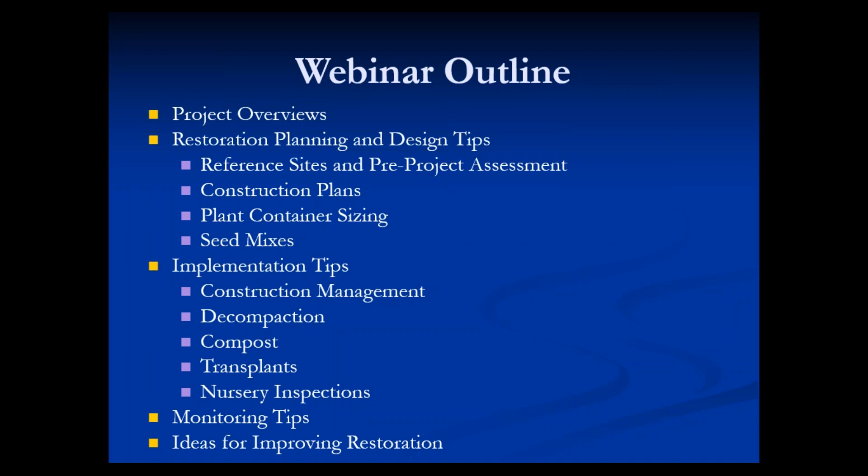So let's get started. I've got 4 projects I wanted to share with you, and they're spread around the state. We have 3 different regions, basically, of Colorado. The eastern half is essentially part of the Great Plains. The middle third of the state is essentially all higher elevation, western mountains and valleys. And then the western third is arid west. We're going to start with a project outside of Meeker, which is in the western mountains and valleys.

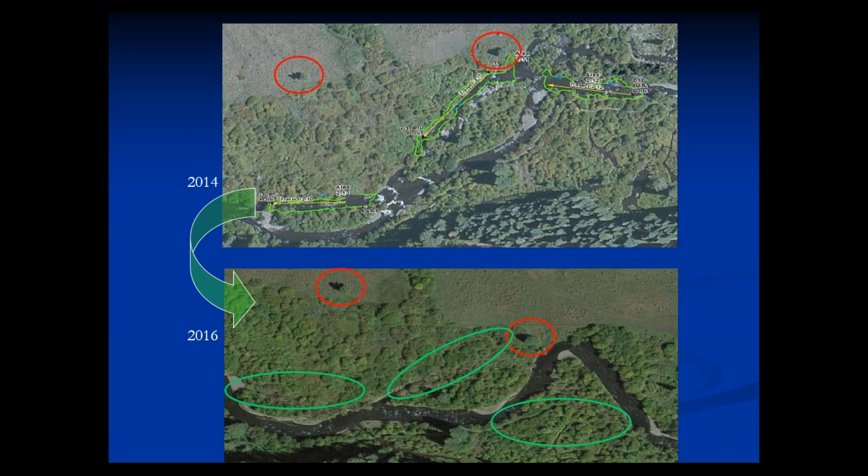Here's another reach that we worked on. You can see all those weirs in the channel. We basically pulled those out, restored some sinuosity, and re-wetted the floodplain. So again, very nice results 2 years later. This is what the sites look like on the ground. You can see great vegetation establishment. These are 2 different sites 1 year after construction. So we were able to salvage a lot of sod and a lot of whole willow transplants. Okay, so that's it for the Meeker project.

Now let's move to one in Fort Collins. This is the home of Colorado State University, where many of my friends and colleagues do their work. This is on Fossil Creek, right in town. We restored 1,500 feet of the channel and about an acre of wetlands, and did this project with Ayres Associates. And here you can see it's pretty confined work area. We have residential development and ball fields on both sides, and this was a drainage that was historically probably not even perennial, and became a water conveyance system, basically carrying water from one canal to the next, which completely unraveled this whole thing.

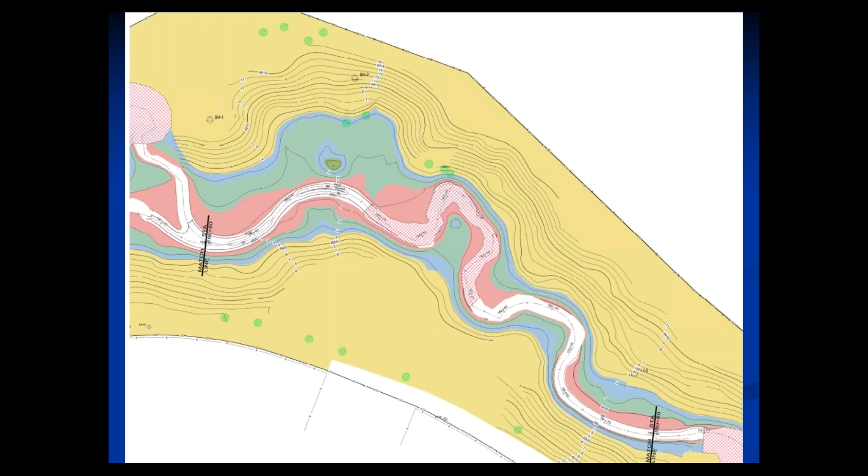This is our design. The different colors represent different target habitat types. So red being emergent wetland, green being scrub shrub, and blue being riparian, and then yellow uplands. And so this is what it looked like after construction. So 2015, we did the work. As I said, it's very confined. So we had to use these soil lifts in some areas to protect the banks because we couldn't lay them back and get shallower slopes.

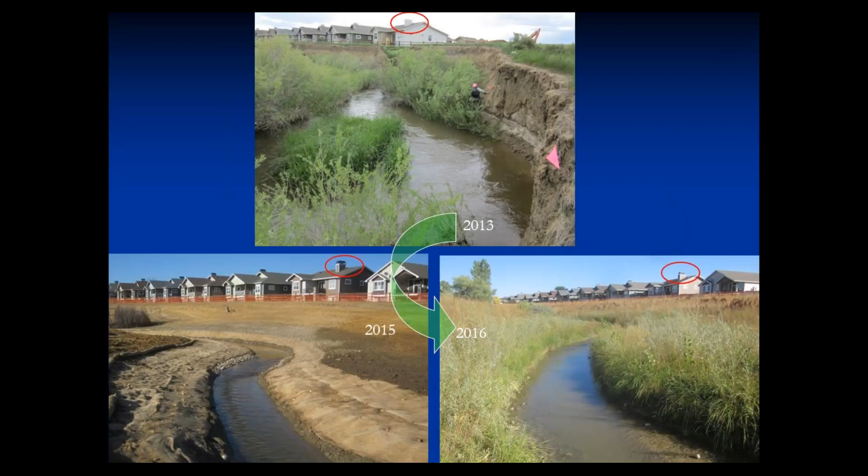But you can see excellent vegetation establishment in 1 year. Again, the red circles to calibrate your eye. A lot of these are really hard to convince yourself you're looking at the same view, especially for this project. Incidentally, the housing development was under construction in 2013, so all the houses aren't even in this photo. That's why it looks a little different.

Again, here's another view. You can see in the lower left, this is really nice. Right after construction, you can see our zonation that we were planning on. You can see the zone of saturation. So again, very nice establishment 1 year later.

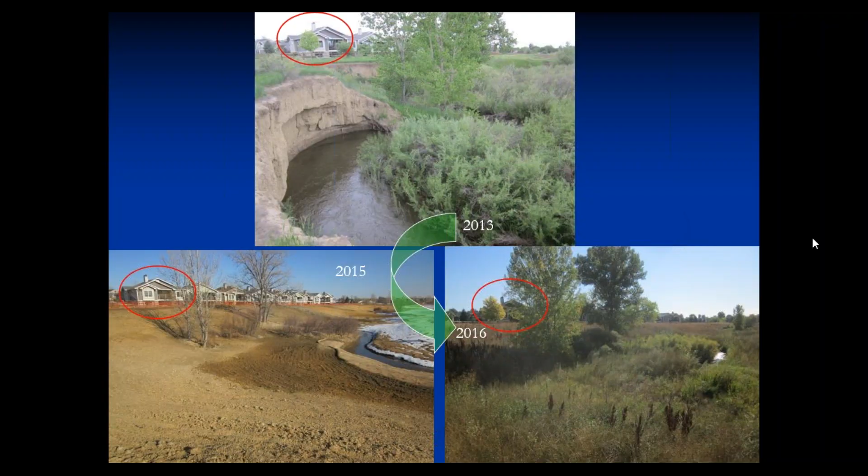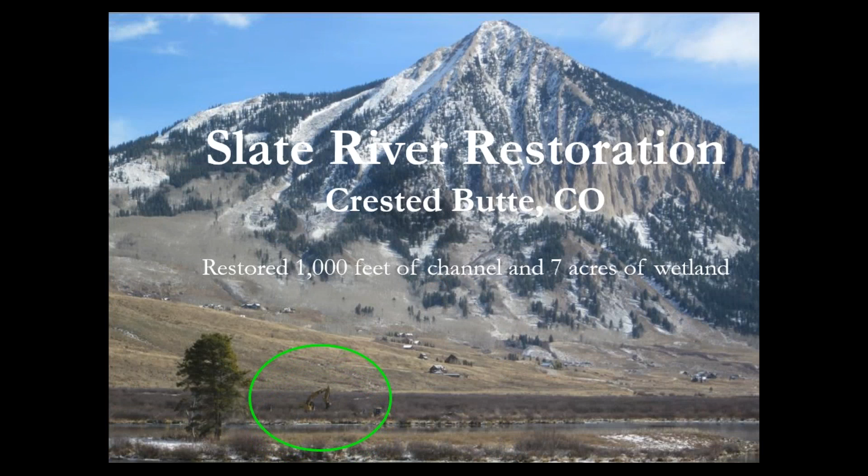Okay, another example project is one in Crested Butte. This is again in the higher elevations, and this was the Slate River restoration. We also call this one the Peanut Reach because it's next to Peanut Lake. And here's our excavator in the foreground for scale, so you can see what this site looks like. Basically, this is the town of Crested Butte, and our site is just outside of town, right next to Peanut Lake, which is a very popular recreation destination for bird watching and hiking.

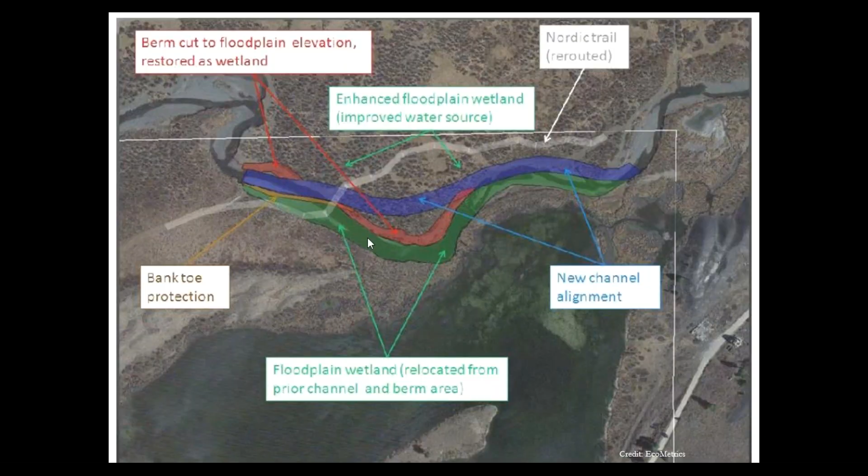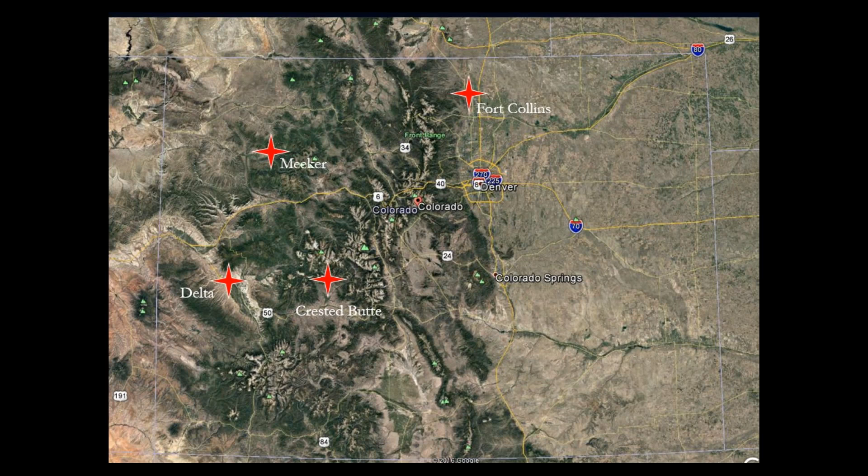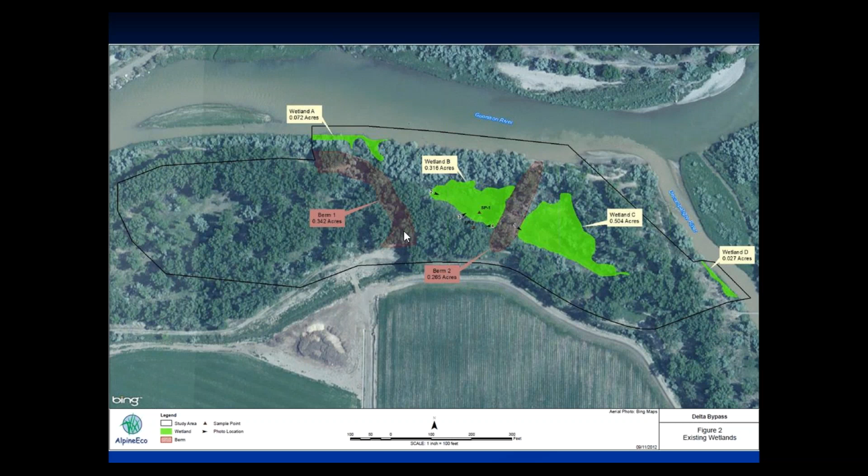Okay, next project and last one is over in the arid west in Delta, Colorado. This was a 404 compliance project, a Clean Water Act compliance project. So wetland mitigation, created about 3 acres of wetlands down at the confluence of the Uncompahgre River here, the dirty, muddy one, and the Gunnison River. This was a map of the site before our project. So existing wetlands are in green, and these red areas are berms, old fill areas that we wanted to remove from the floodplain, again, to try to reconnect these rivers to the floodplain environment.

This is the plan, basically to create new wetlands here in orange and connect to the old, take these berms out, and create what is essentially a meander scar or secondary channel type environment. Originally, I wanted to connect this to the Gunnison River on the downstream end here, but because of land ownership issues, we couldn't actually do that. So we ended up making our backwater connection here on the side, and that allows high flows to enter the site and provide additional functions that we wouldn't get if we didn't have that surface connection. We didn't want to connect here at the top because we didn't want to run the risk of capturing the river in our site.

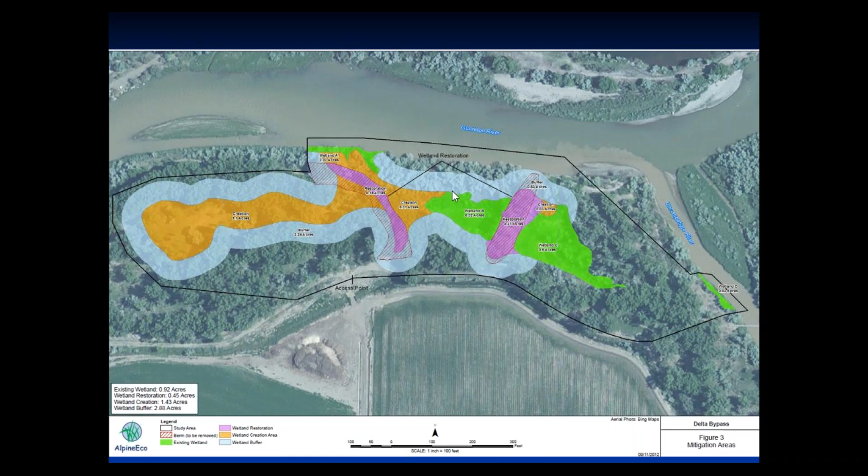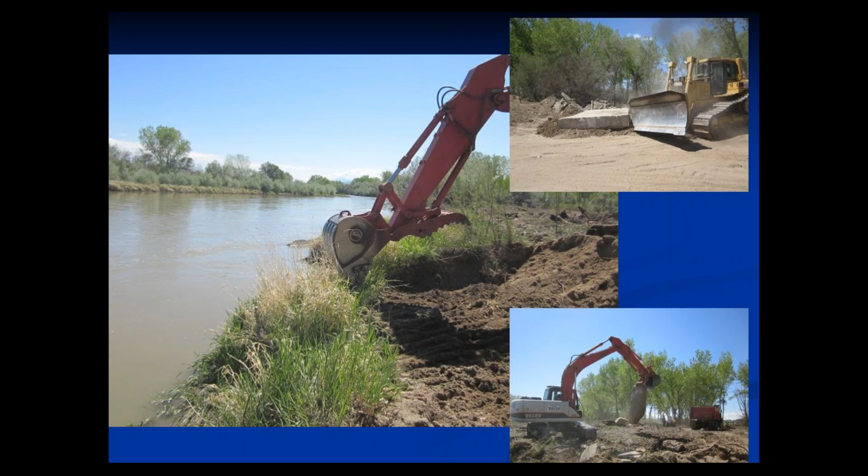Here's the construction of the connection to the river, and then the other side photos here are pulling the berms out, mostly broken concrete from, I think, the 40s and 50s. This is what the site looked like after construction. Again, just a meander scar type setting. We were able to salvage some of the trees we had to take down, which was only about a half a dozen, but we were able to salvage them and place them back into the wetland area as habitat features. So you can see here, this is right after construction in 2013.

The site's very dry and cobbly. Maybe it would make some people nervous, but I felt confident in our design and our depth of excavation, knowing that we would be getting seasonal inputs from the river and seasonally high groundwater.

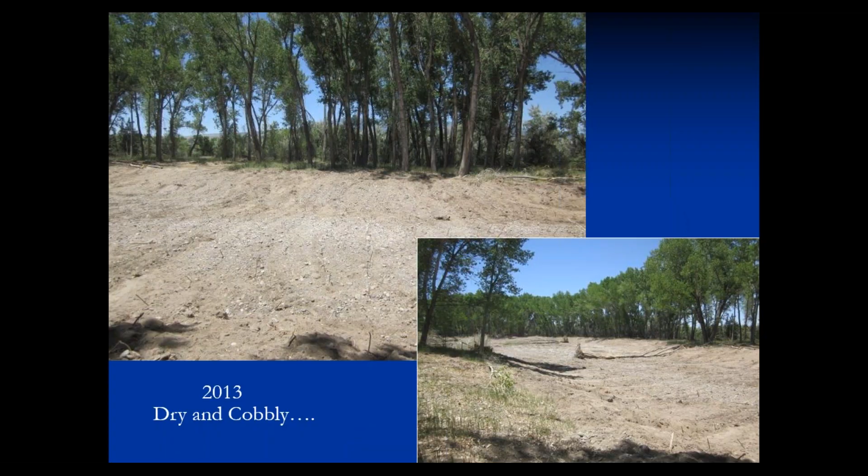So we just kind of crossed our fingers and hoped for a normal snowpack, because that's what's feeding this system, snowmelt in the higher mountains nearby. And luckily, it worked out. This was spring 2014, and we had really good snowpacks. We had excellent runoff. You can see this is the Gunnison River flowing left to right and entering our site as planned through our backwater channel.

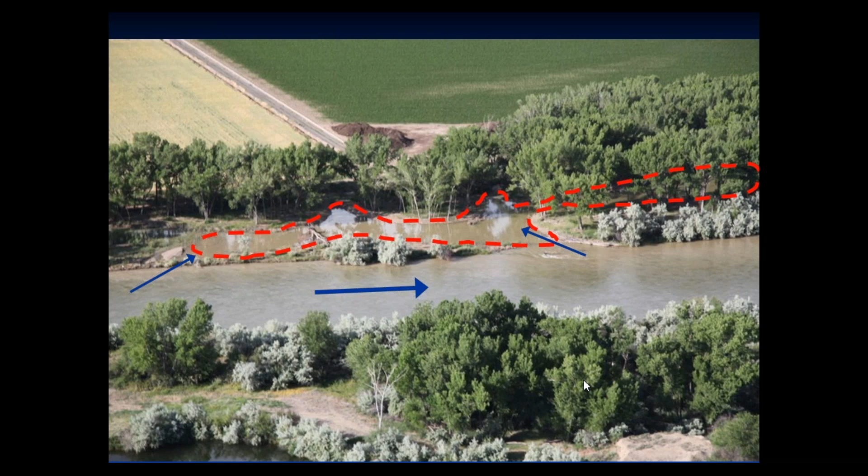And then we were actually getting some additional input here from the top because the river was so high. Our normal high flows would be only entering here. So it worked out great having that water enter the site, and then it actually stayed in the site for about 6 weeks. We ended up getting all kinds of fines deposited, and it created a perfect environment for the germination of thousands of cottonwoods and willows, creating this blanket.

And you can see in this photo, we actually have some of our planted willows in the photo too. So it turned out great. This is the site this year, 2017. We've got willows 8 feet tall, and cottonwoods as well. Another good success story for us on the Gunnison River floodplain.

Okay, so that's about all I've got for project overview. I wanted to go ahead and get into some of the restoration tips. And again, I didn't mention this on the outline slide, but this presentation is not intended to be a comprehensive list of things that you need to know to restore wetlands. It's not even a complete list of the different steps that need to be taken. What it is, basically, is some of the issues that seem to come up frequently, topics that are easy to discuss in this kind of format, and important things that I think could provide some value to you as practitioners or researchers on your projects, hopefully.

So I want to start by talking a little bit about planning and design tips and the importance of pre-project assessment. We need to have some data to guide our restoration designs and our restoration goals. And the best way to do that is to do the pre-project assessment so you know what's wrong with your site. So again, let's go back to our Meeker example. In this case, I'm using a tool, Functional Assessment of Colorado Wetlands. This is FACWet, we call it, created by my friend and colleague, Dr. Brad Johnson, and also Mark Beardsley and Jessica Doran. It's a rapid assessment method for assessing wetland condition. It basically gauges the departure from reference condition.

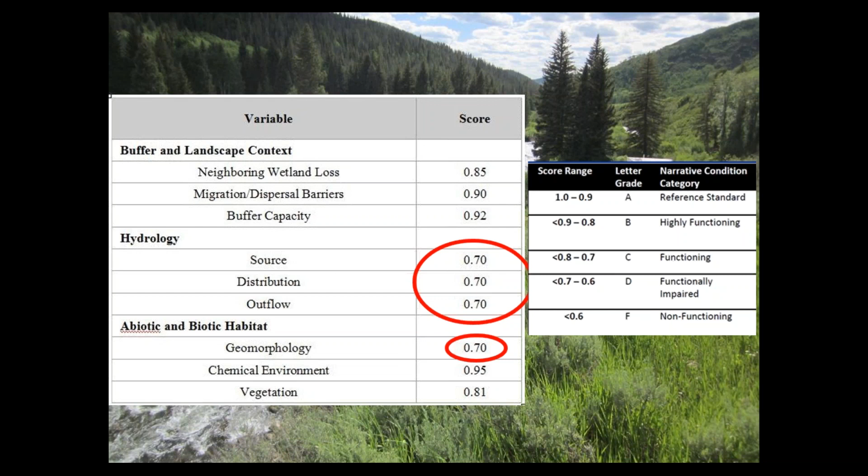So, with a 10-page data form, you end up scoring different variables, and you can see for this project, our hydrology variables got dinged pretty hard because of those weirs and levees and lack of overbank flow. And then we can take those variable scores and turn them into function scores, and that again helps guide us: what is it we're trying to fix? What are the goals for our project? So we're using this assessment tool to tell us what we really want out of our project.

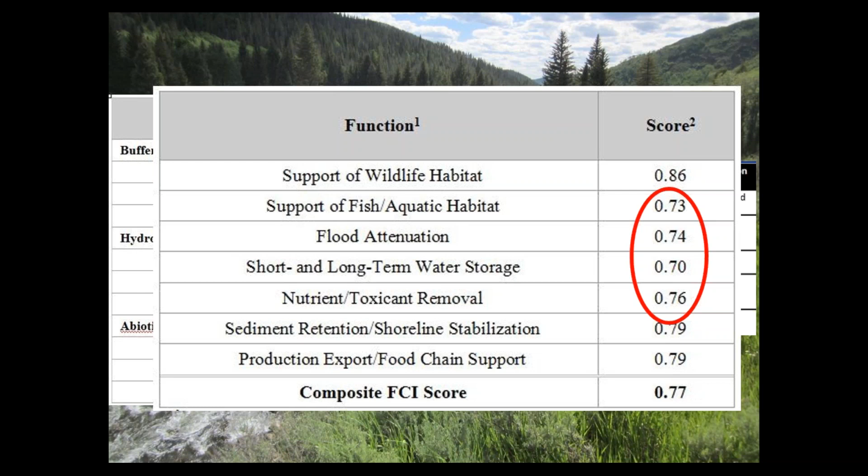Another way to get information about your project and what you want your restoration goals to be is to use reference sites. This one is a little problematic in my opinion. It's hard to know what reference condition is. It's hard to define what reference is and what it means. And it's sometimes hard to find reference sites, honestly. In some of these areas where there's been significant human development, it's difficult. So I wanted to just touch on this briefly with a project. This is on the Poudre River. It flows basically from outside of Fort Collins, Colorado, down to Greeley, Colorado.

This summer, I did an assessment of the riparian vegetation of 40 miles of the Poudre River, and this site struck me as a potential reference site for the project. Connected floodplain, meaning it's overbank flooding into this area. You can't see the river in this photo, but it's just off to the left. So the site's getting wet seasonally, which is allowing for a lot of cottonwood and other woody plant recruitment through this regular disturbance regime of big flow events and then low flow. And the site really looked good. It was really what we wanted to see adjacent to the river.

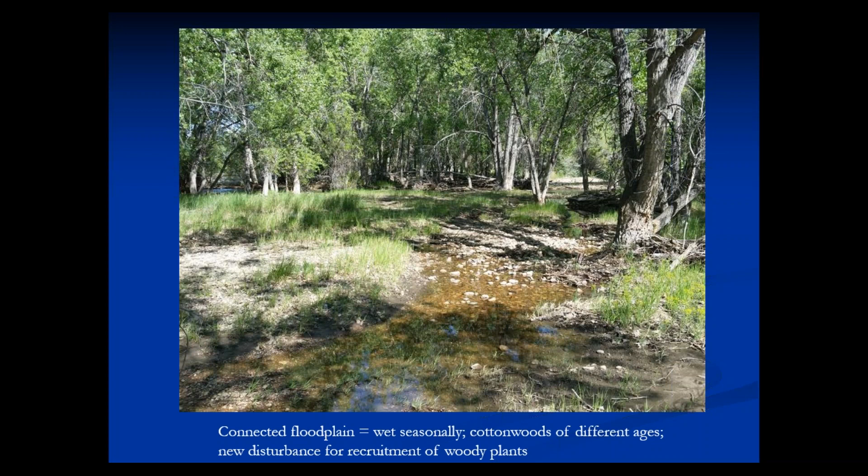And so we scored all these different riparian polygons, and our photo was taken right around here where my cursor is. But you can see we scored these sites anywhere from an A+ to solid Bs and C+, which is pretty good. But it might strike you as fairly low scores for a quote-unquote reference site. But I just wanted to make the point that these reference sites aren't always pristine. They have to be within the realm of what's possible today, given our constraints.

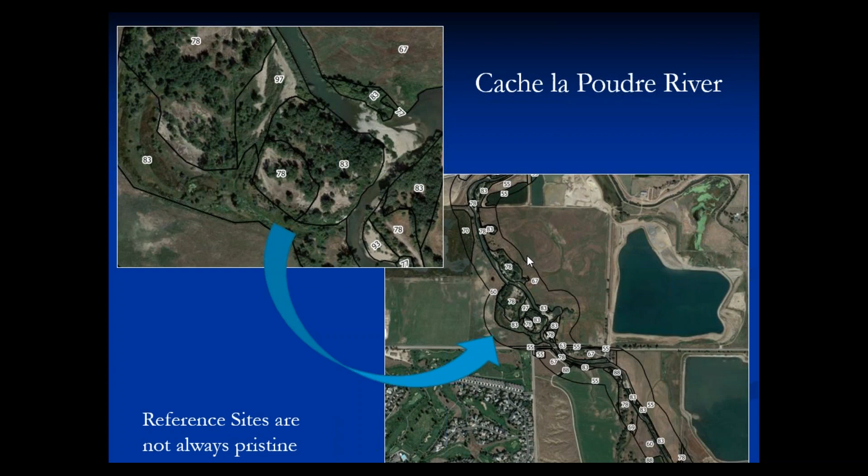And what's interesting is if we zoom out a little bit more, this is the same area, and you can see the scores around here are pretty bad. Like we have some Ds and some Fs, basically because of land use practices and so on. And if we zoom out even more, we can see, wow, this reach of the river is really altered. How could you possibly get a reference site in this reach?

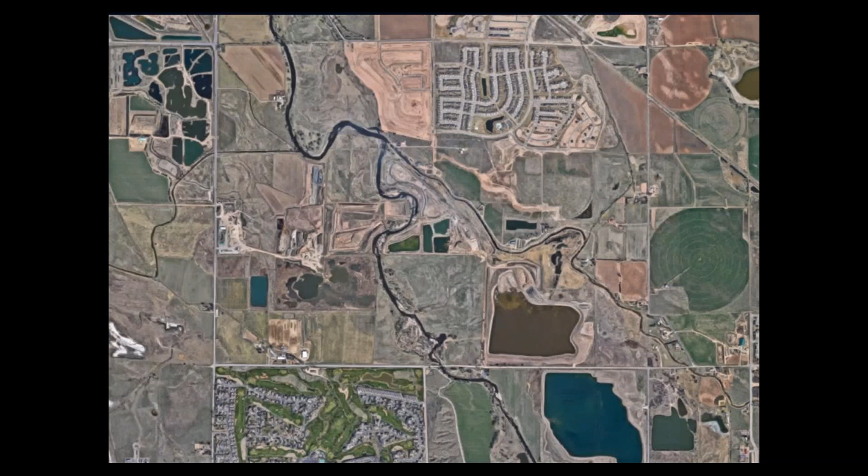But if we look for a diamond in the rough, we can find these areas and use them as reference sites, knowing that this is what may have occurred elsewhere in this entire reach, and keeping a close eye out for these, again, these gems in the rough.

Okay, continuing with the planning and design idea, let's talk just a little bit about construction plans and developing construction plans for your restoration project. When I say plans, I mean the ones that all the contractors are carrying around in their trucks and walking around in the field with. It's your design and all the details that go with it. Typically, we would contribute sheets to these packages for projects on the restoration earthwork and the revegetation details.

And what I like to call thorough simplicity is really the target for my designs. I want my designs to be concise but informative. These plan sheets can't be too complicated or messy or difficult to decipher, because then a lot of the details get ignored or just cast aside. When we're putting together these plans, we're always thinking about constructability. And what I mean by that is, what does it take to actually implement the plan?

And if you haven't done a lot of this kind of work and you haven't been around a lot of heavy equipment, I would suggest befriending a contractor who does, because you can't do an effective design for a restoration project without some level of understanding of what is possible for equipment and for people to actually do. There's lots of different kinds of equipment that you can use for these projects, but they all have their own subset of issues with regard to access and maneuverability and capacity to move material and so on. And there's a lot of complicating factors with trucking, and it gets complicated. So if you don't have a comfort level with constructability, then try to connect with someone who has that experience.

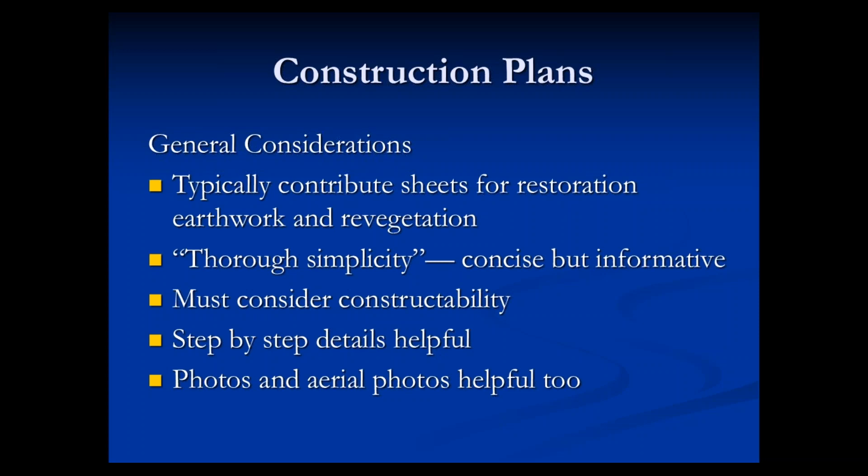So let's talk a little bit about the construction plans. This is, sorry, I lost control again here. Try this one more time.

There we go. So this is an example of a planting plan. This one came across my desk recently, and it basically exemplifies everything I don't like about planting plans. In fact, I'm getting a little dizzy just looking at it. It's not impossible, but it's difficult to decipher what's going on here. It's too busy. There's a lot on here. And one of the most important issues that I have with it is designating specific areas for planting woody plants. You can see these circles are to indicate shrub and tree placement.

To me, this is a landscape architecture design. This is like urban planning. It's like building a park. You know, you want the oak tree next to the bench. This is not restoration to me. It's not the way I think we should approach these projects.

Now, this is more like what my restoration plans look like. They look simple. This is actually the Delta project. We've got 3 zones of plant material. We've got green for emergent, orange for scrub shrub, and blue for riparian. And we can calculate our acreages of each zone so that we know what our estimated plant quantities are for each zone. But we're not designating exact planting areas.

And this is accompanied by a cross section, and this is a typical cross section. It's just a cartoon. It's not a real on-the-ground cross section, but it shows the contractor, hey, we have 3 planting zones, A, B, C, and they correspond to these zones in this design, although this cross section is actually for a different project.

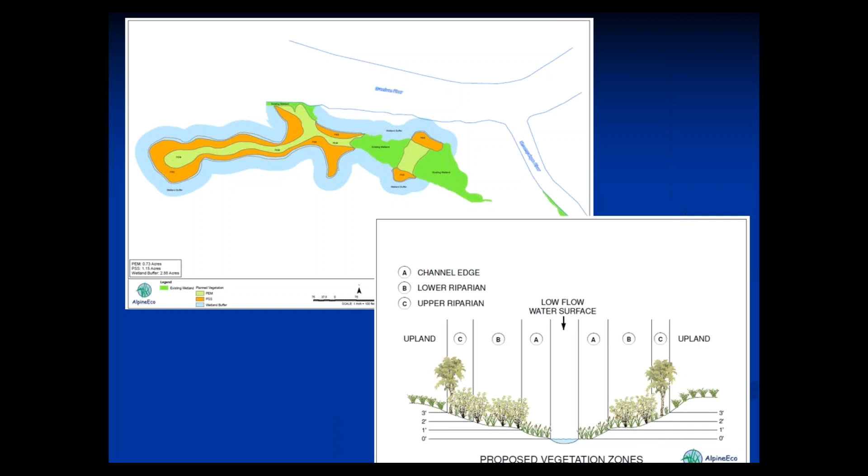And it shows, you know, we have a suite of plants that go in zone A, and they are situated between 0 and 1 foot above water. And then we have another suite of plants that go in zone B between 1 and 2 feet, and so on and so forth. It's very simple, straightforward, and then we combine that with a sheet like this that provides the details on the plant species and quantities needed for each zone, and then our seed mixes, and then some general notes, which we'll talk about more in a minute.

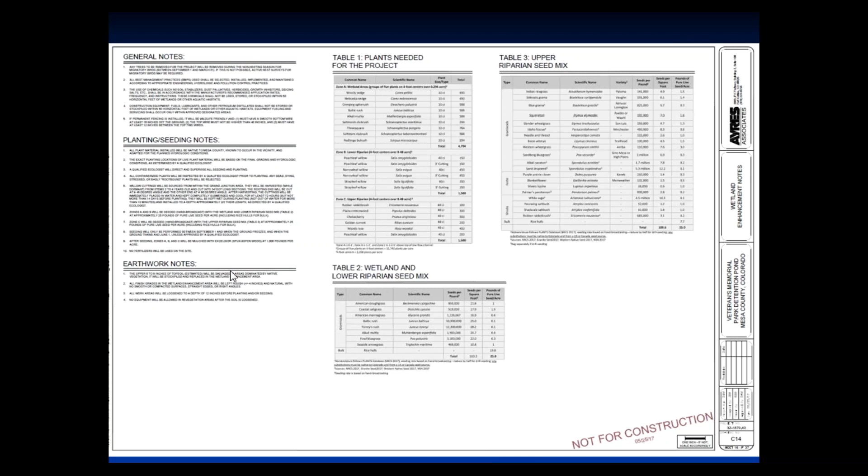If we zoom in a little bit on what's needed for these planting tables, it's just what you would expect. Here are our 3 zones. Here are the different species that we want in each zone, the quantities that need to be planted. And in addition to that, I'm also including information on our proposed density of planting. Again, this is a guideline.

We're not designating, you know, we want you to put 1 plant on 3-foot centers everywhere like a grid. Sometimes we do that, but it's a guideline. So in this case, I'm saying groups of 5 plants on 4-foot centers. And then for zone B, it's 4-foot centers and so on.

Another thing I wanted to point out on this slide is that you might have noticed that I'm specifying both cuttings and containerized stock for this particular species. This is something I frequently do. We've been using cuttings for a long time, and we go harvest these from live plants and put them in the ground. They have their own purpose. It's nice when we need to get deep to try to access groundwater with those plants.

But by far, it's my preference to bring containerized stock to the site that has existing root mass, so the plants don't have to struggle to develop roots for the first year or 2. We can put them in the ground and they can sort of hit the ground running.

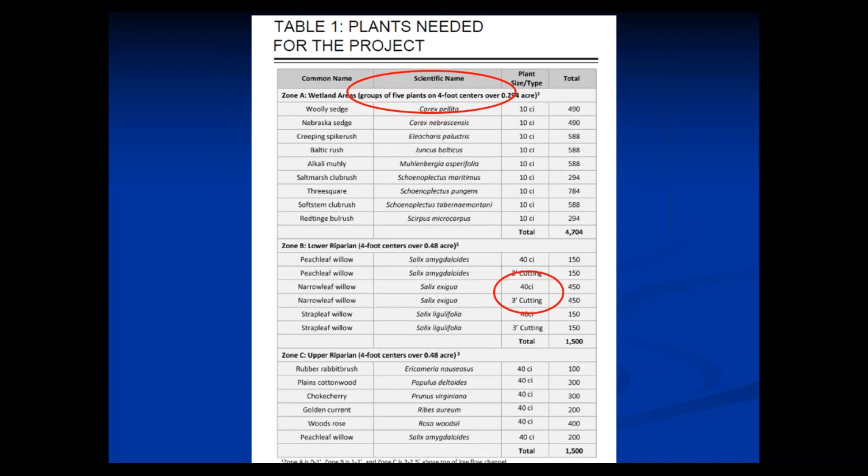Okay, back to the construction notes idea. I try to get all important details regarding the restoration site construction into the notes. Now, some of these things come from specifications that might be a separate document, but I get everything onto the plan sheets because I don't want them to get lost in the shuffle.

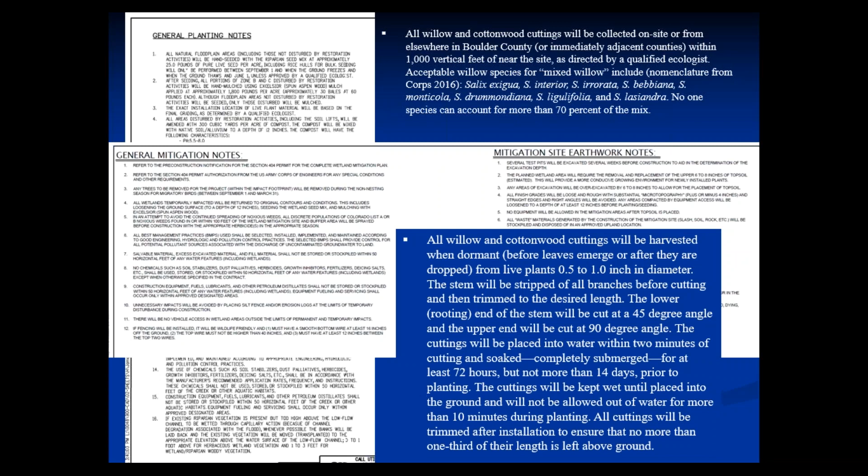It's things like compost specifications, compost application rates, seeding application rates, what is our mulch approach and what is the application rate? How do we harvest the willows? Where are we getting them? How do we handle them once they're harvested? What is our specification for loosening or decompacting?

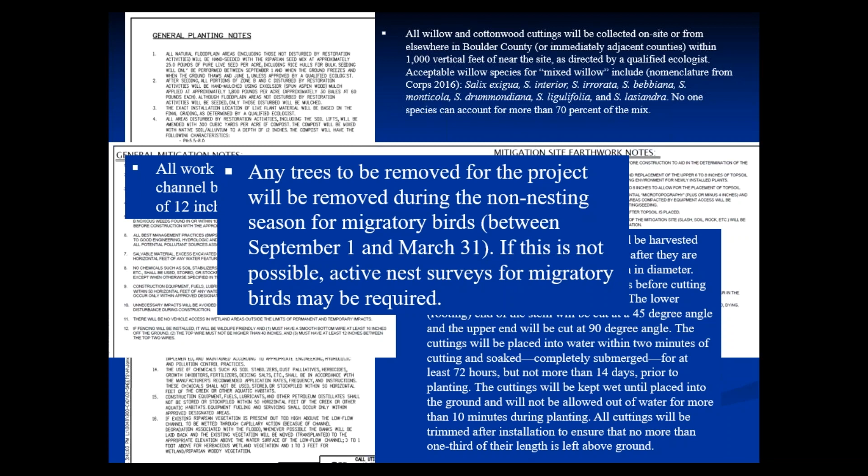Do we have other regs that we want the contractor to be sure to comply with, such as the Migratory Bird Treaty Act? All of these things are important parts of our project, and if they're in the plans, they've got a much better chance of being reviewed and read than they do if they're just in a specifications document.

Okay, moving along here, a little bit on plant container sizing. This is a big deal for me. Most of my career, we were sort of forced into the 1-gallon, 5-gallon options because that's all that the growers were providing. Now we're seeing a nice shift into deeper rooted stock, which is much more my preference for restoration. I feel like the 1 gallon, 5 gallon is a carryover from landscaping and really doesn't have a lot of application in restoration sites, as far as I can tell.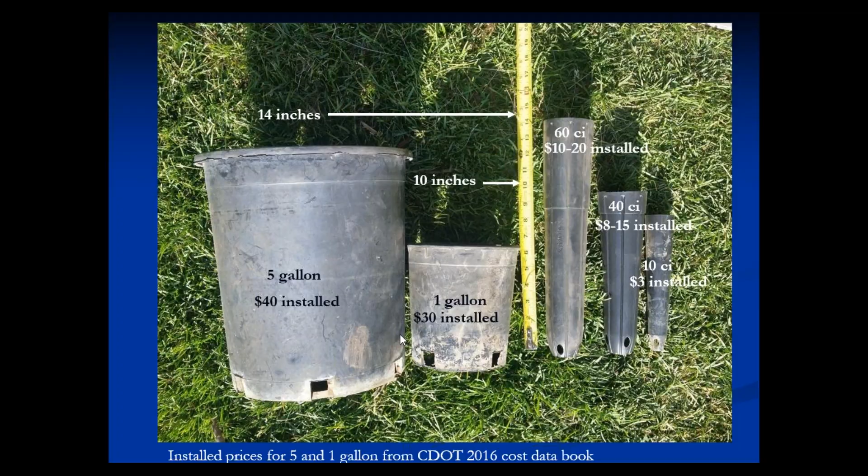I got the same depth of root ball as the 5 gallon, and I'm getting much better distribution on my site, so I'm not putting all my eggs in one basket. So that's much more attractive to me with restoration than the fewer, bigger plants. Now, that maybe doesn't apply to some of your urban projects where you have requirements for larger tree stock.

Here's another problem that I've seen a lot with the 1 gallon containers. It's only 6 inches deep to start with. And then, if your nursery only puts 4 inches of fill in there to grow the plant in, you're talking about a 4-inch deep root ball. And if you're trying to access groundwater, you're going to have much better luck with a 10-inch deep root ball that you get in a 40 CI for a fraction of the price.

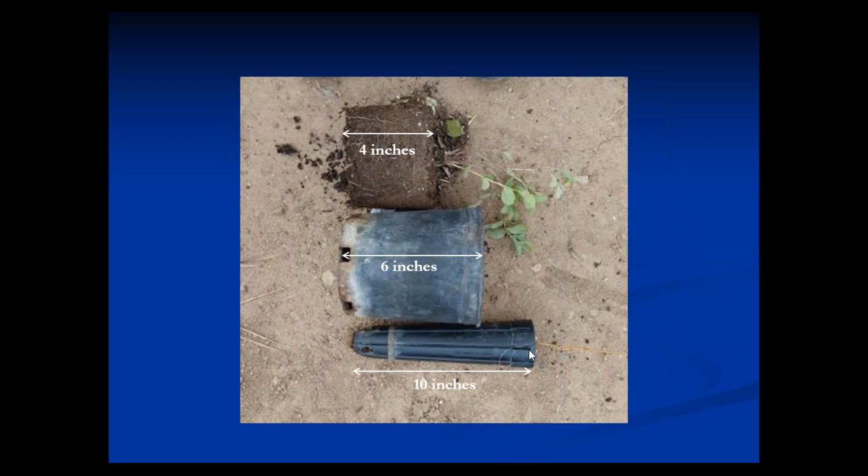Okay, let's talk a little bit about seed mixes. This is a big one. I'm going to try to keep this brief, but this is a typical seed mix that I might use on a floodplain where we have some wetlands and we have some riparian areas.

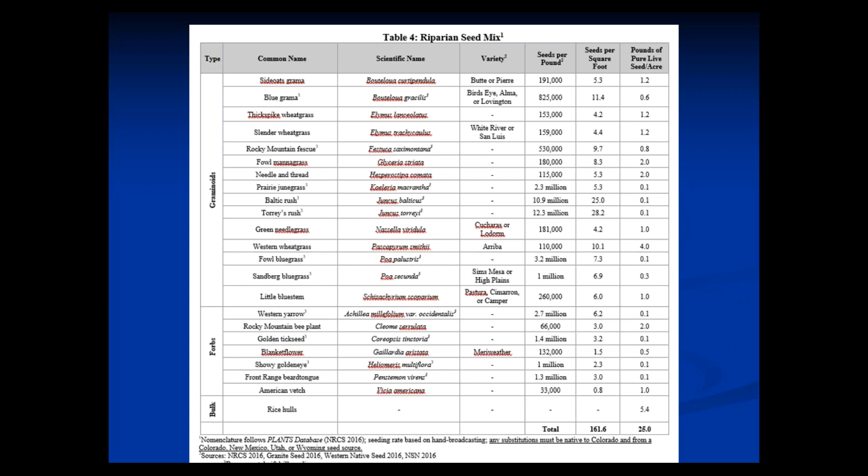And you might notice that there's something missing. I have no sedges in here. I have nothing from the Cyperaceae family in these seed mixes. And that's mainly because most of those species require the seed to be stratified before it germinates. And it can be stratified naturally.

If you're seeding in the fall, you might get good stratification over winter and you see good germination in the spring. But if you're seeding the site in spring, those seeds are likely just to sit there and get eaten by birds and small mammals or blow away before they germinate. And most of our projects, we have pretty aggressive re-veg standards for pretty short term. You know, within 5 years, we want pretty good cover.

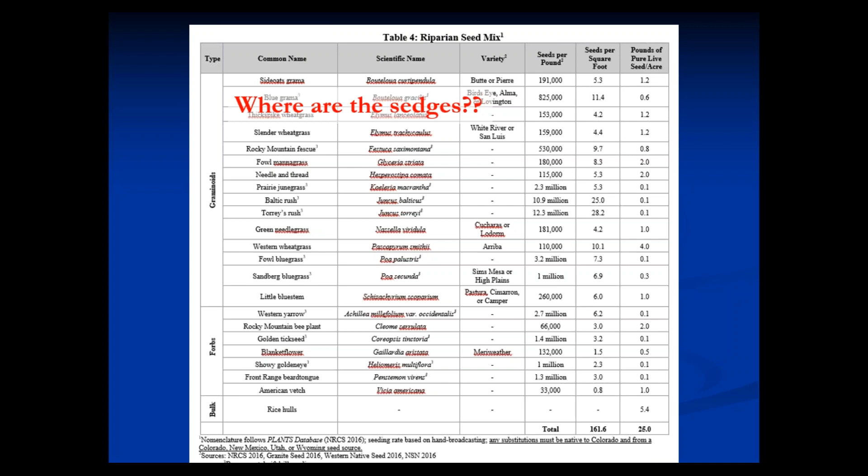So most of my mixes, I then just focus on those plants that I think are going to germinate well and give us good cover, and then we'll supplement the seed with live plant material. And that's where we hit the sedges hard, is on the live plants. A couple other things I wanted to mention with regard to seed mixes is I think it's important for your plans to include any seed varieties if they exist. Basically, these are plants that are specially crafted to perform well in certain environments. And so if those are available to you, then you ought to be specifying them.

And then seeds per square foot, this should show up on the plans as well, because if there are substitutions to be made, it's not as simple as, oh, I have 2 pounds of Glyceria and that's not available, but Deschampsia is, so I'm going to add 2 pounds of Deschampsia. Well, we need to know how many seeds per square foot because those vary greatly. And you can see my total seeds per square foot in this mix is pretty high at 160, but this is a hand broadcast rate, which is normally double your drill seeding rate.

And we do have several of these species that have a lot of seeds per pound. Many of you have seen Juncus seed, but it's basically like dust. And so a lot of those seeds actually don't make it into the site. They either blow away or they stay adhered to the sides of the bag and so on. But important to be considering seed size.

Another thing that I do with my seed mixes, especially for those that are just wetland seed, is wetland seed is typically mostly very small seeded species. So we end up with maybe only 7 or 8 pounds of seed for an entire acre. So that's really difficult to work with. And so I'll add rice hulls to all of my mixes to get them up to 25 pounds so that we have more material to work with. It also provides a visual indicator because the rice hulls are bright white, so you can see where you've seeded.

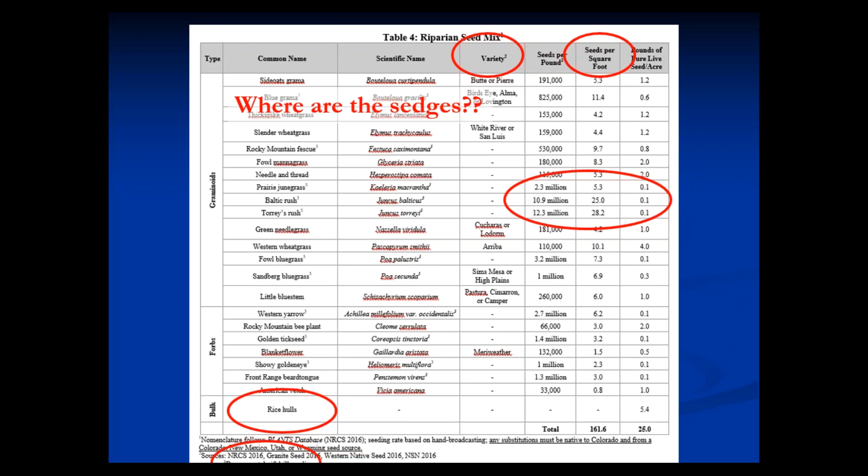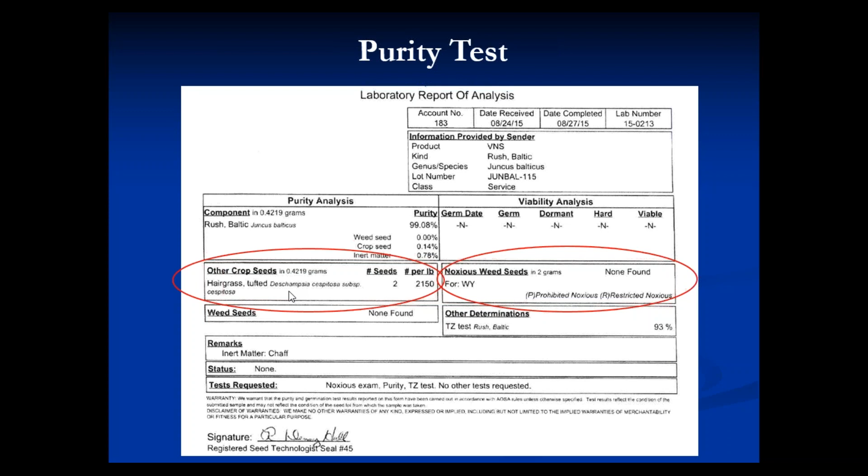Another thing I'd like to discuss with regard to seeding is the purity tests. This is really important, and I think a lot of people are not aware that you can request this information. So here's a purity test for Juncus balticus, and it basically tells me what else is in the seed. So here it tells me there are no noxious weeds, none found, which is great. But it also tells me there's some other crop in here. We've got 2,150 seeds per pound of tufted hairgrass. In this case, it's fine with me. That's something that would naturally occur, and we might be seeding anyway. So I would accept this lot of seed.

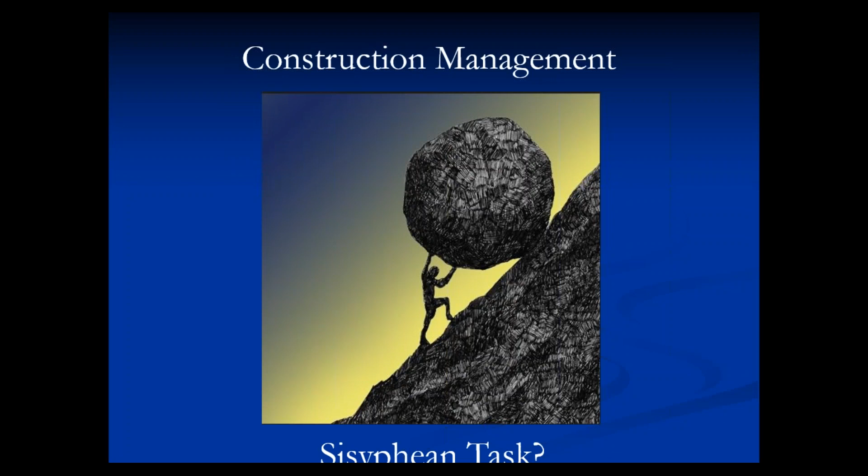Okay, let's talk about some implementation tips. I wanted to start with some thoughts on construction management. It's a little cut off here, but is construction management a Sisyphean task? I don't know if everyone's familiar with Sisyphus, but he's the guy who has to roll the boulder up the hill for eternity, and it keeps rolling back down on him. So I sometimes feel like Sisyphus when I'm doing construction management. Basically, construction management is being out with the contractors, helping them decipher your plans and build your restoration site. And oftentimes we get to work with contractors that we've never worked with before, that maybe have never built wetlands before.

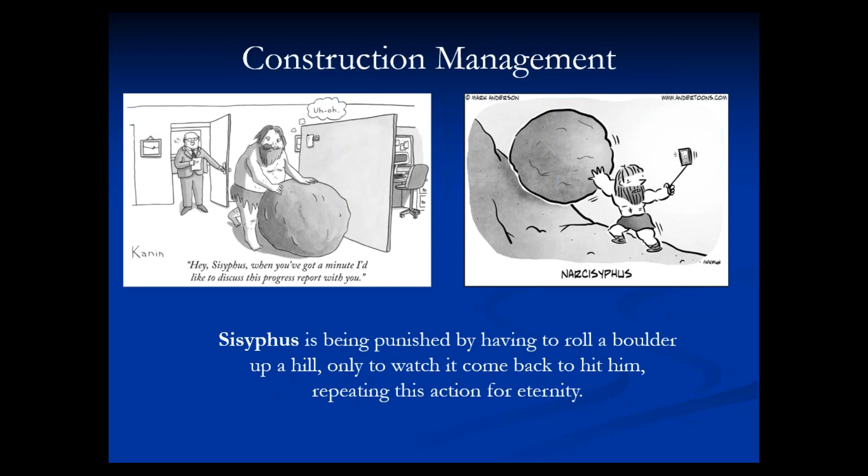And so I find myself being very repetitive with these projects, saying the same things to all the different contractors. So it sometimes feels like a futile task, which is what Sisyphus is experiencing. So just a few tips on construction management.

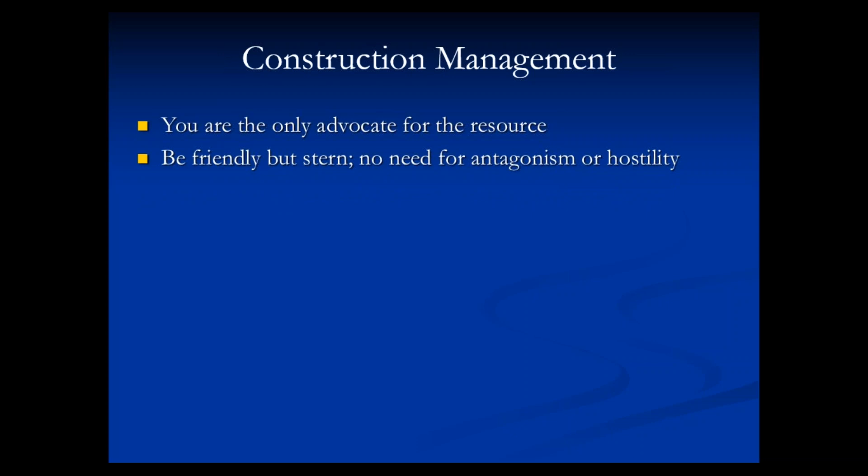If your client has hired you to be out there during construction, you are the only advocate for the resource. You can assume that and take on that role. Whatever you have to say about it is going to make a difference. It's important to be friendly with the team, but stern. If there's something you need to get done, you can get it done, but there's no need to be angry or antagonistic about it.

The plans and specs that the contractor is using to build your restoration site, the plans and specs that you developed, are the contract for them. So it's what they base their bid on, and there should be no surprises for the contractor when you ask him or her to follow the design and the specifications. I think it's important that you do your best to adhere to the plans and specs that you developed, unless there are field conditions that dictate otherwise.

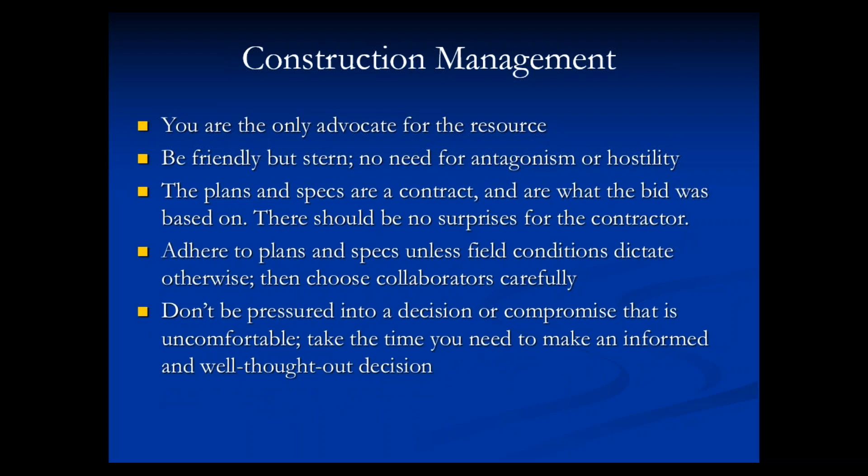If you do need to field fit something, I think it's important to choose your collaborators at that point wisely. Some people on the project team may have ulterior motives or other interests, usually around money. So if you want to collaborate with the team, just make sure you're taking their input with a grain of salt, and be sure not to be pressured into a decision or a compromise that you're uncomfortable with.

If you need to stop work and make the excavators and the haul trucks all sit idle for half an hour while you figure out what you want to do, do that, because at the end of the day, you're the only advocate for the resource, and you need to make the best decision you can make.

As the construction manager, you need to be careful dictating means and methods. And what's meant by that is you've given the design, but you can't tell the contractor how to implement it, how to get it done. All you can do is say, hey, this is what I want at the end of the day, and then the contractor gets to decide how he gets there. That's the way a lot of the contractors make a lot of money.

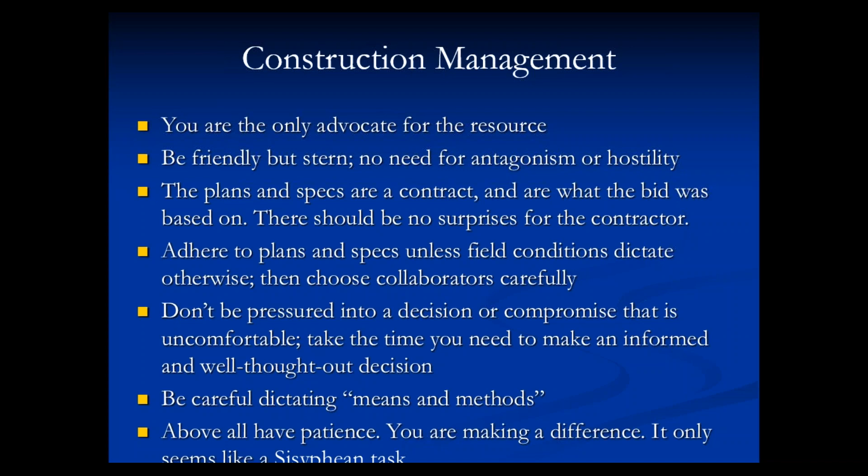A lot of these people are really good at what they do. They're really good at coming up with innovative, unique approaches to solving problems. So you may think you know the best means and methods, but chances are you probably don't, and somebody has a great idea that will get you there. So at the end of the day, have patience. You are making a difference, and construction management may only just seem like a Sisyphean task.

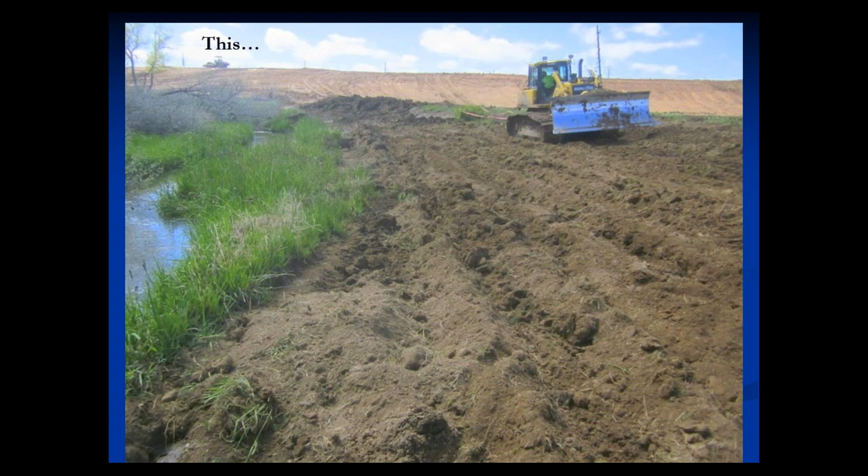Okay, sticking with implementation, let's talk about loosening. If there's one thing that I'd say is the most important part of restoration, it's not leaving these sites compacted. You must loosen these sites before planting, after all the construction's done, especially if these areas have been used as haul roads or used by other equipment.

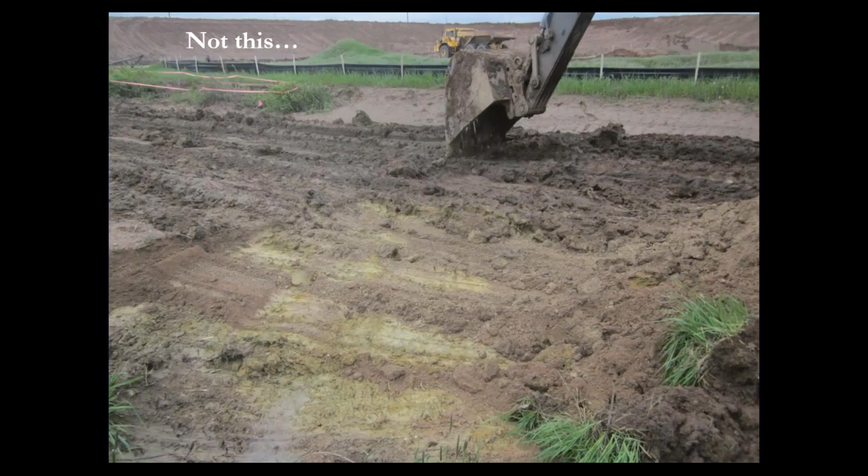We want this kind of loose, friable environment. We get more potential for habitat diversity. We get areas for water to collect, for seed to get nestled into the soil surface. We get some wind protection. We get potentially some shade. It's just really good for all things restoration. So we want something that looks like this, not like this. And not like this. There's a little video for you.

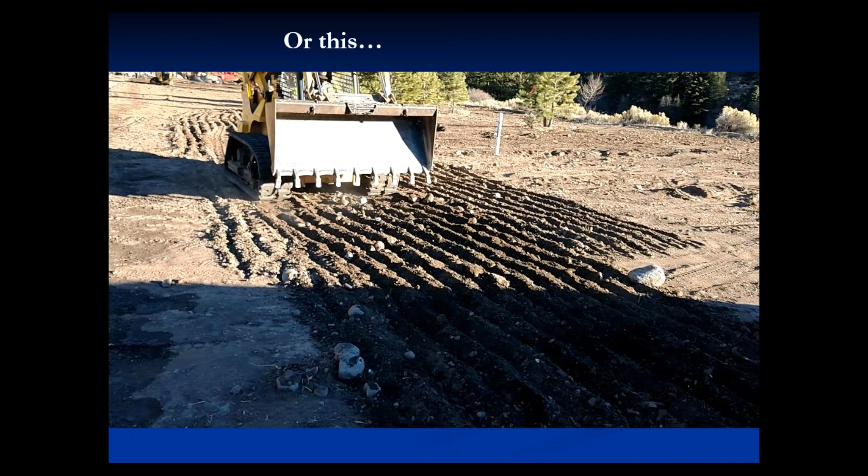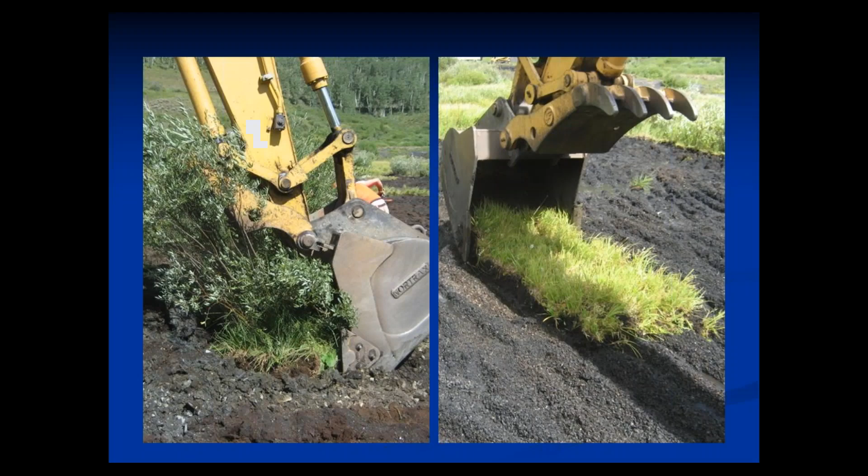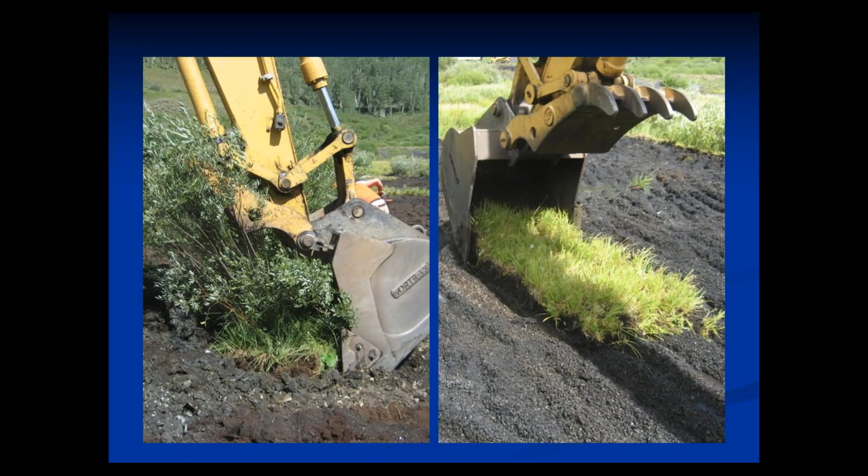Okay, moving along here with some more tips. Transplants. This is another really easy, cheap, amazing technique for getting instant vegetation. I would expect most of you are doing this already, but you can use an excavator to harvest willows or sod mats and replace those in your sites. Here's the Peanut Reach project. We had an excavator for a day. It cost less than a couple thousand dollars, and we transplanted 40 or 50 whole willows. So really nice, easy way to get good veg cover.

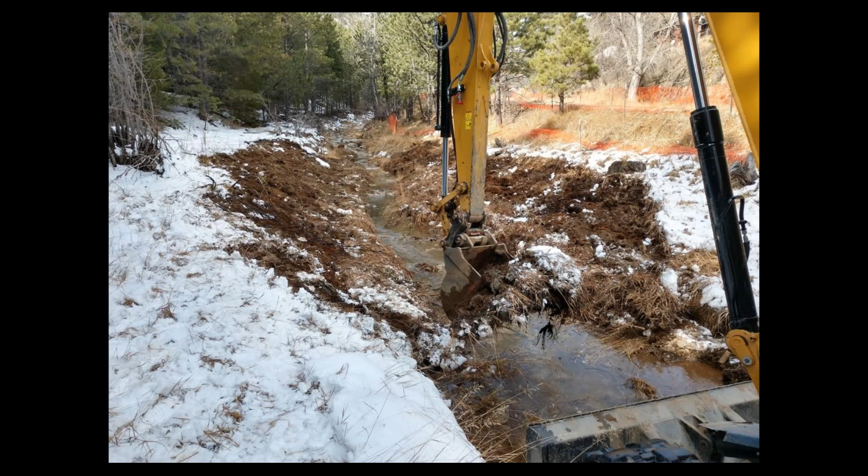This was just this week on a project where we were transplanting wetland sod, moving it down to the new channel location. Instant veg, instant bank line. Here's another video for you. This is again on a Peanut Reach. We were able to harvest again great existing sod and willows, and in this case we were actually using it to form the bank line like I mentioned earlier in the aerial photo. So we're moving this from some existing wetlands to our new wetlands so that we can have instant bank protection.

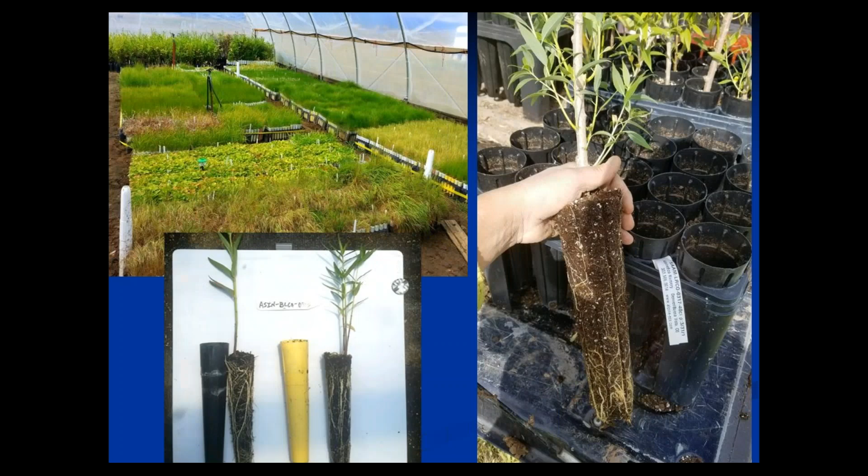Okay, nursery and plant inspections. So before any of my projects get planted, I make sure I inspect the plant material. I either go to the nursery to do that and inspect it on site, or I inspect it when it's delivered to the project. What we're looking for here is nice, tight root balls that have nice, healthy, vibrant roots. Above ground mass is fine. I'm not that interested in that. Sometimes we do want a lot of above ground mass because we want a deep plant or something, but generally I'm much more interested in the below ground mass.

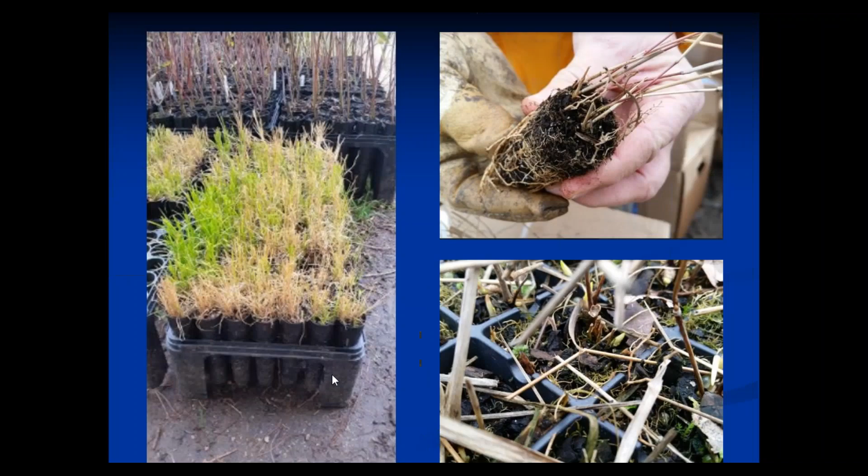Some typical problems we see, here's an example of maybe where the irrigation didn't quite get these plants, so we have some dead stock. The photos on the right, this is the job I did with friend and colleague Scott Jecker down in Oklahoma. We're taking the delivery in March, and we were having a difficult time determining whether these plants were dormant or dead. And we did end up determining that some of them were dead, but really tiny shoots here.

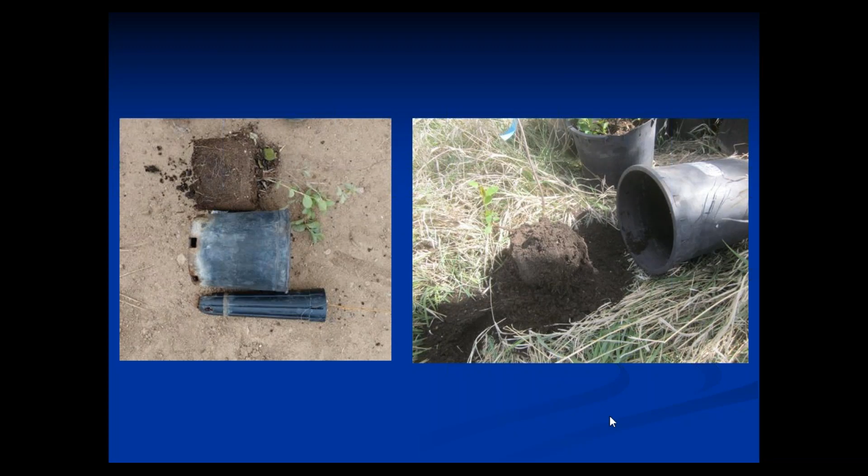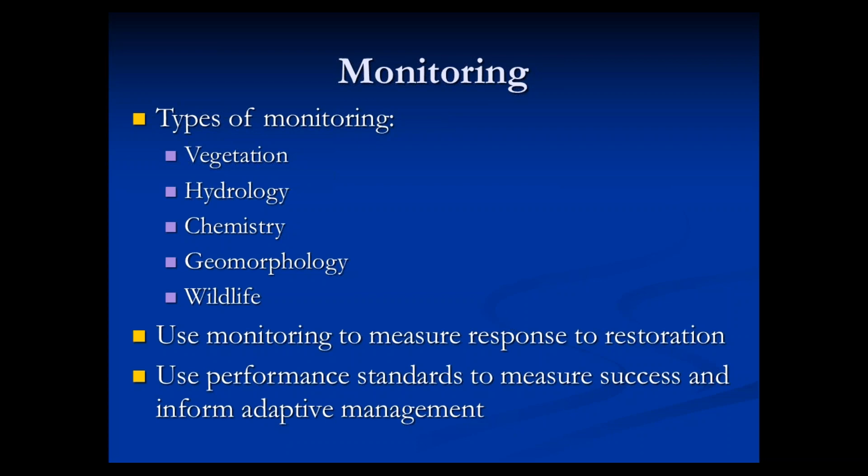Okay, monitoring tips. We're kind of getting near the end here. There's all kinds of different monitoring to be done. For today, I'm just going to talk a little bit about vegetation monitoring, but generally monitoring is a way for us to measure the response of the site to the restoration, and then we use performance standards to measure success of that response. So a few tips on performance standards. Basically, as I said earlier, the performance standards are synonymous with our goals and our desired condition. They should be measurable and verifiable and be practical.

They need to reflect the monitoring period. If you know ahead of time you're only going to be able to monitor for a year, or if you're going to monitor for 5 years or 20 years, then you can craft your performance standards accordingly so that you can get some meaningful results within your monitoring period. They also should reflect your ability. If you're not a great botanist, don't have performance standards that require you to key everything to species. You can do cover by growth form, or you can do other things like measure slope stability, or use other techniques that don't require botany.

And then it's really important to craft the language of the performance standards carefully. The standards should be flexible enough to foster unforeseen benefits, so you can take advantage of good things that happen on your site. And some examples are, if you use language like X% cover, that's great, versus X% survivability. If you say something about survivability, then you really need to compare what's on the ground during your monitoring to what you installed. And so you're doing some math and you're having to count plants, which is problematic.

Saying something like List B noxious weeds versus state listed, like here in Colorado, we have List A, List B, List C, and watch list. So if you just said state listed species had to be less than 5%, you'd be monitoring all of those, and maybe all you care about are List A and B. Another example would be saying that this site has appropriate wetland hydrology. That gives you some flexibility. But if you say something like 14 consecutive days of saturation within 12 inches, you're kind of sucked into monitoring daily during the growing season.

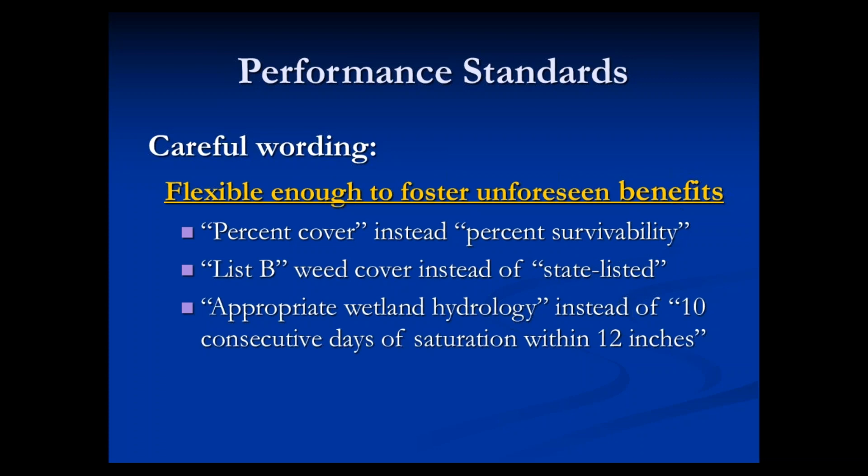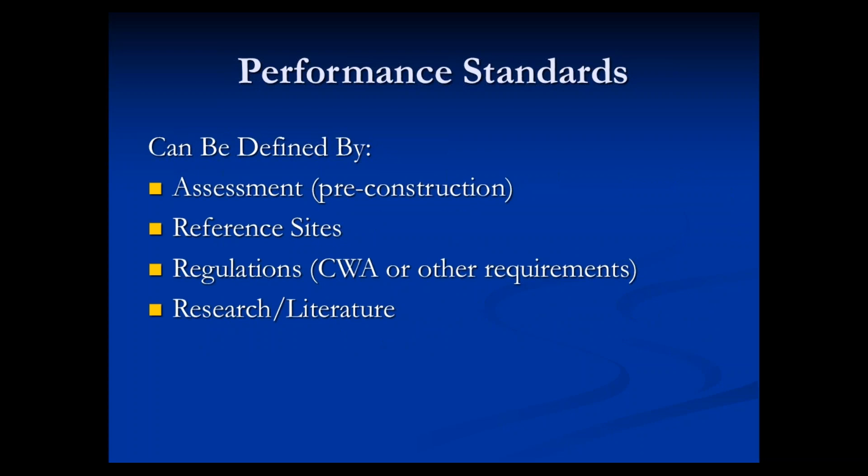Performance standards can be defined through different ways. As I said earlier, you can define these through assessment, your pre-construction assessment, like we talked about, through reference sites. And they may be dictated by regulations, or you may be able to base your standards on research.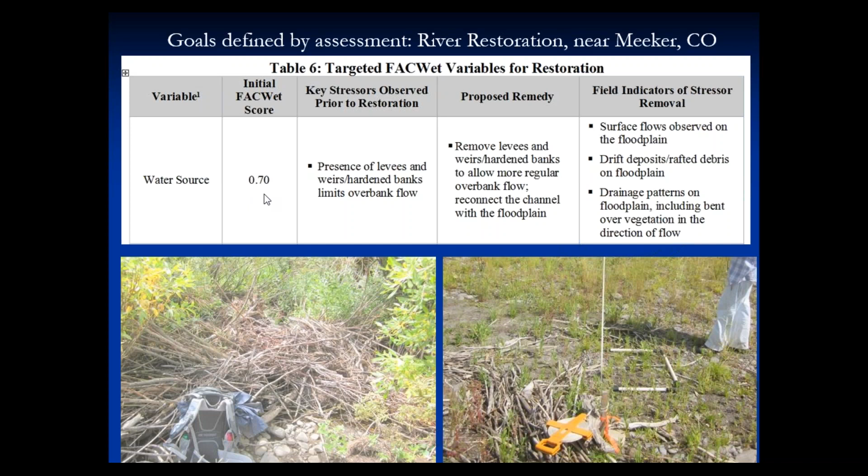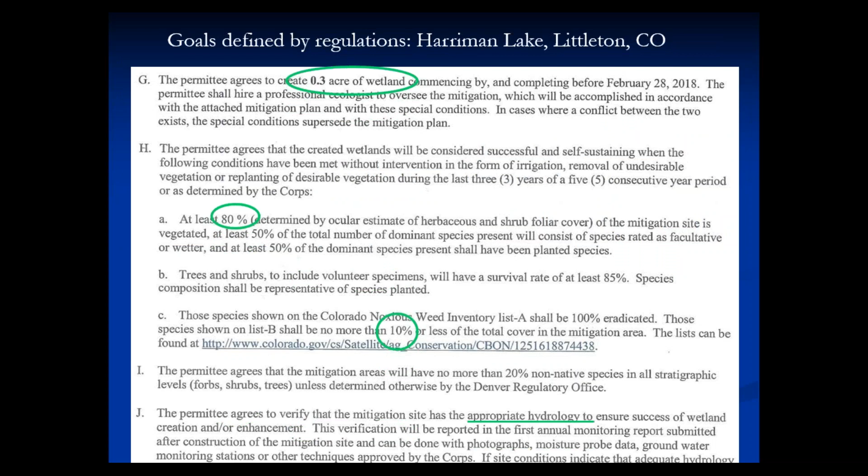So here quickly are a couple examples. This is the river restoration in Meeker, where we set our standards based on our assessment. We know we want to get our hydrology variables up, so we're basing our standards on that. Here's an example where it's based on the regulations. So this was handed down to us. There's really nothing we can say about it. We have to get this many acres, this much percent cover of good veg, and this much maximum cover of bad veg.

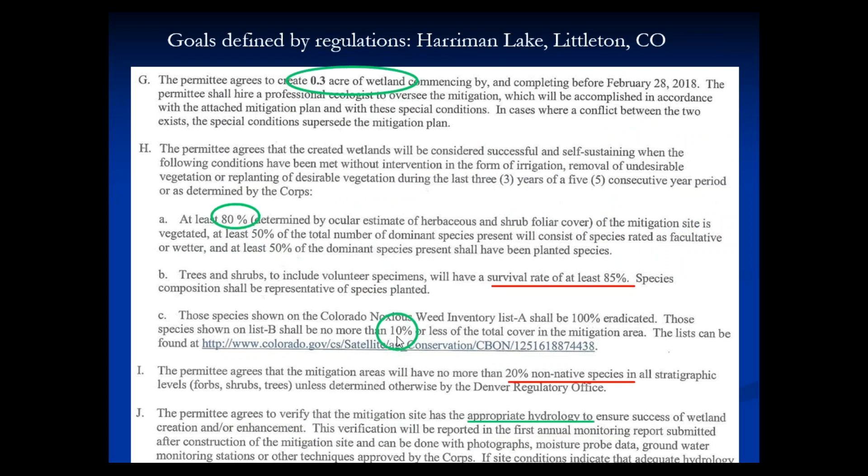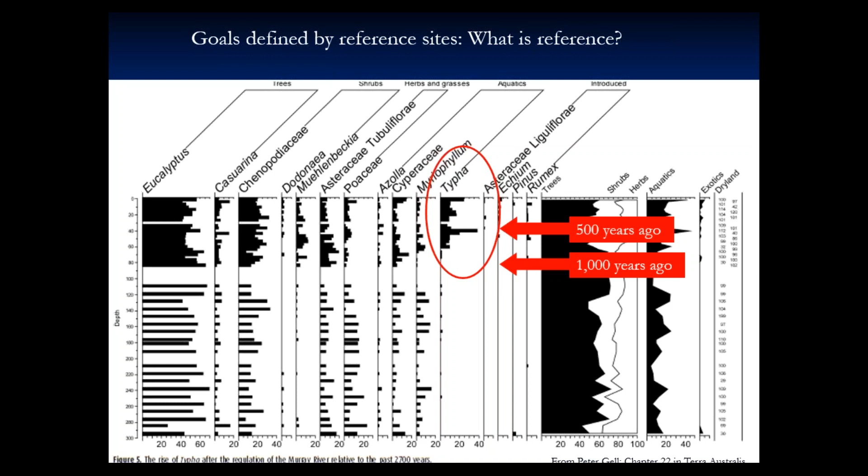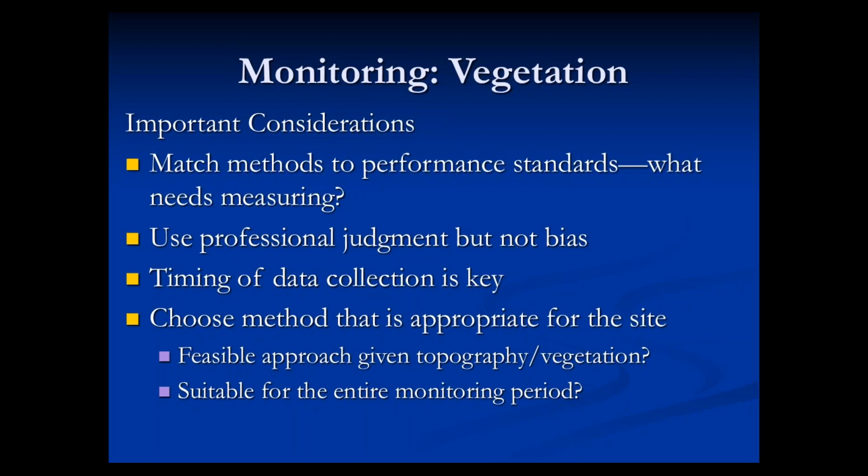Okay, and then some important considerations on the veg monitoring. Your methods need to match your performance standards, and you need to choose a method that's appropriate for your site. Timing of data collection is key. Being there at the same time every year. I visit all my sites in either August or September, kind of the peak of the growing season.

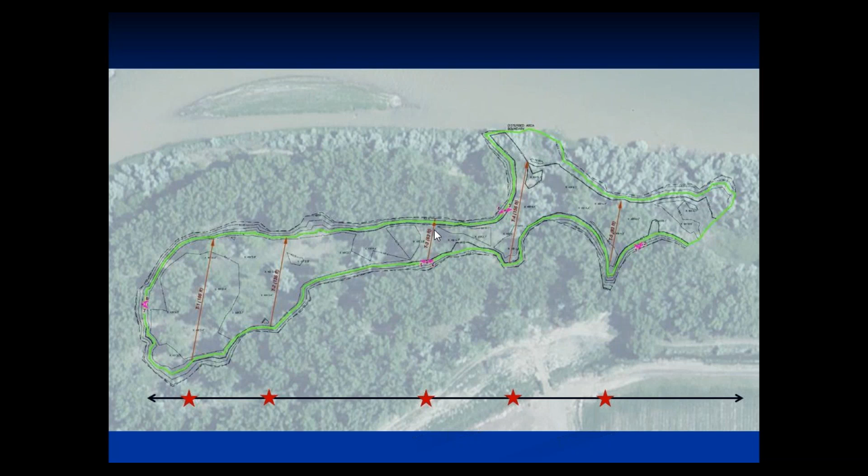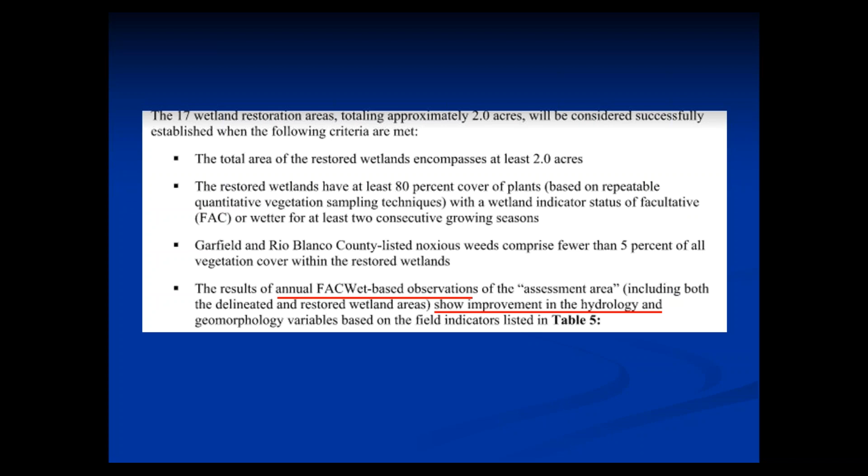Okay, I think this is the last little bit of monitoring tips. The function-based approach, again, going back to this Meeker River Restoration Project, we're using FACWet, our functional assessment for Colorado wetlands, as a tool to help us assess whether our restoration was a success or not. Do we show improvement in the hydrology variables? It was really easy. I set up this data sheet. Basically, here are our impaired variables. These are the reasons for our impairment. Basically, in this case, we're not seeing overbank flows because of the levees and the weirs.

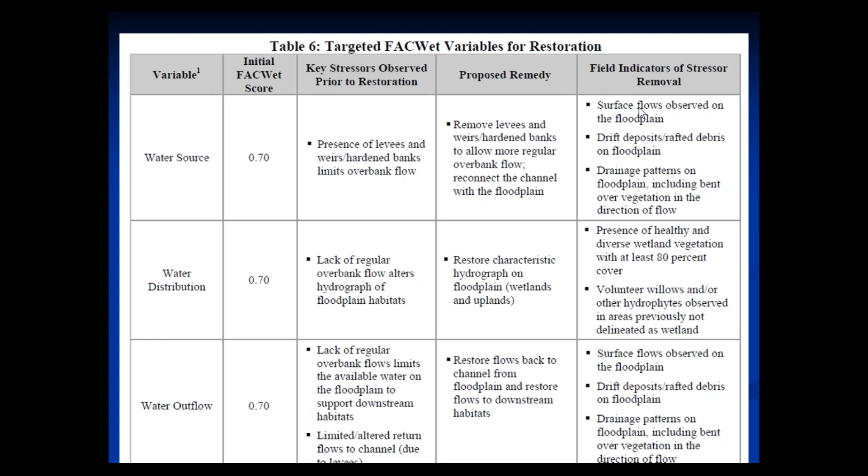We proposed our remedy as part of our restoration. That is the restoration, to remove the levees and restore the overbank flows. And then we can just simply go to the field with a checklist and say, do we see these things on the ground? Have we been successful at restoring surface flows? Pretty easy. Any monkey could go do this and be like, oh, wow, yeah, we do have drift deposits. We do have evidence of flow. We do see a healthy and diverse vegetation community developing. We do see volunteer hydrophytes. So it's a really easy way to get a functions-based approach of success rather than spending days monitoring vegetation cover. We can come out and very quickly determine if we met our goals.

Okay, this is the last slide. I didn't want to leave this presentation without briefly talking about some ideas for improving restoration. These are really big topics, and I would love to have more dialogue about any of these. As you all probably know, we're having our annual SWS meeting in Denver in 2018. So I would love to connect with any of you here to talk about these things.

One idea that I have, it's not that unique, is to create a database of professionals. And then people that sign up to be part of the database could search for experts by region or by expertise. And I think we could use the wetland restoration section as a starting point for this. So we have a form that all of us as professionals fill out in terms of what we think our expertise is and where we work and what we like to work with and what we're good at.

And then others can search by keywords to find us. This just came up this week. A friend of mine called and was asking for a wetland restoration professional in Kansas City. So I could easily go to this database and find someone that has met a certain level of screening.

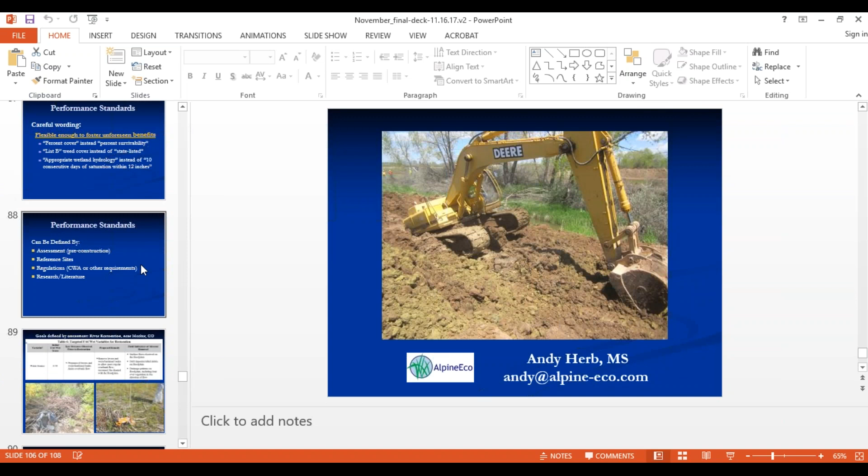There was somebody who wanted you to explain that grid sampling random number method. Do you think you can get back to that slide? Yeah, sure. Do you want me to do that? And after that, I'll end with our announcement of our next webinars.

Yeah, sure. So this looks more complicated than it is. Basically what I did is have my GIS professional lay out a grid. In this case, again, I picked a 50-foot square. So our entire site gets covered by the grids, and any of the 50 by 50s that aren't completely within the site get dismissed. So for example, if my random number came out to be 312, I would throw it out because it's on the edge and it's not wholly within the site. And this site's a little more complicated because we have different habitat types. So I would do a random number generator for each habitat type.

So the bright green here, we then randomly select a number, say it's 340. That becomes the start point of a transect, and I usually will predetermine the length of those transects. In this case, I think these were 100-meter transects. Or no, these were 100 feet. No, these were 100 meter. And so that would be the start point for a 100-meter transect. And then I usually would either predetermine the bearing of that transect, or I would choose it based on how I could fit it into this habitat type.

Right. And for those that are listening, you can do these random point generators. You can get them out of a book, but you can just type it in on Google and say, I need a random number, and it'll give you a series of random numbers to select the cells. Yeah, and I can't tell you how the GIS works, but I have a great GIS person, and he just gives me these quickly. He does the magic, right?

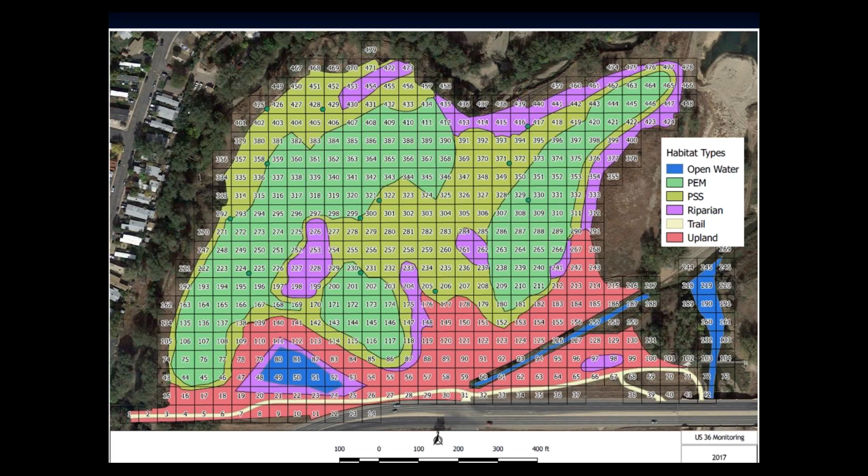That's right. Okay, well, let me get back control here on the screen. We can go out to the bottom slides here.

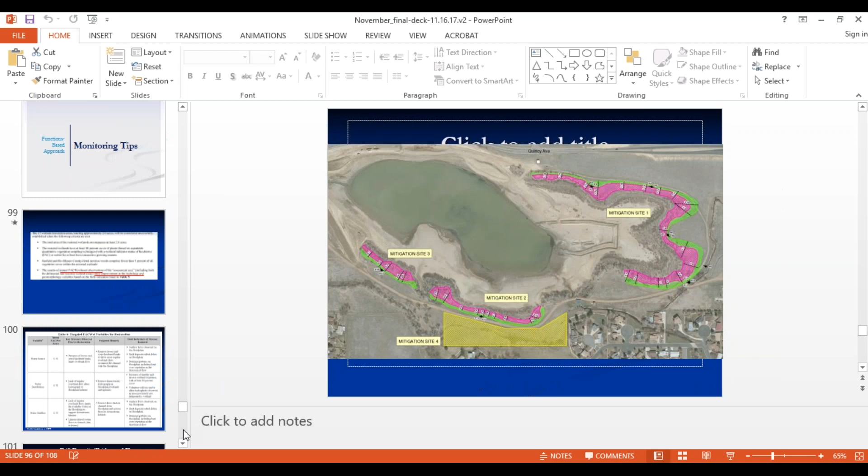And first of all, I want to thank you, Andy, for giving this presentation and taking time out of your day to share all these tips. I think some of these really practical tips are things that a lot of us take for granted, that everybody knows, and so I really appreciate that. And I'm also really intrigued by your idea of getting the academics and the research-oriented folks linked in with the people that are on the ground doing this, because the academics also need to know what really works and what doesn't from the practitioners. So I think it's a really good partnership. So thank you for doing that today, Andy.